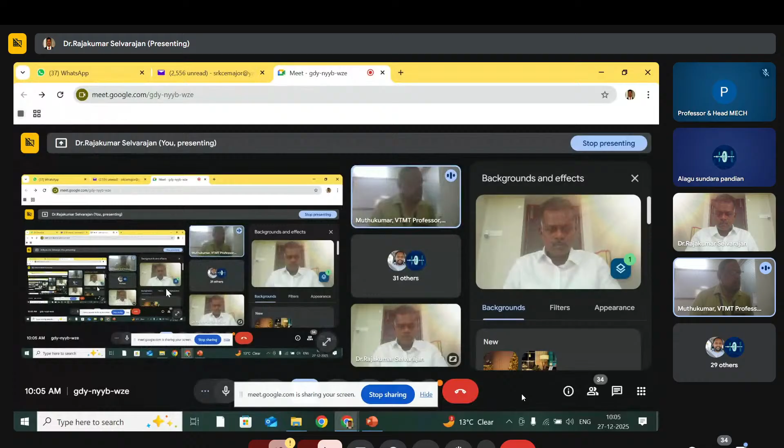Sir, can you please repeat the number of publications and his citation count? There was a disturbance. Sir, 109 publications in reputed international journals. Sorry for the small interruption in the beginning, sir. Dr. Rajakumar, sir, I am very indebted to you for guiding me through my research journey. This is my opportunity to express my gratitude for my research journey, and currently I am serving as professor in Vel Tech Multitech Engineering College, sir.

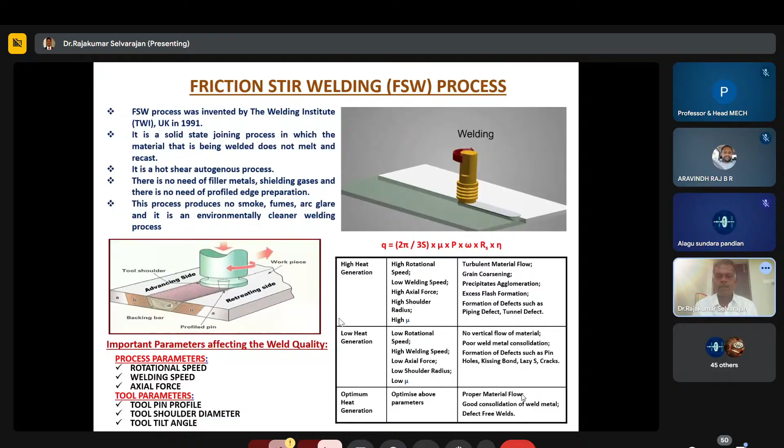So you can see that in the video. We have the facilities.

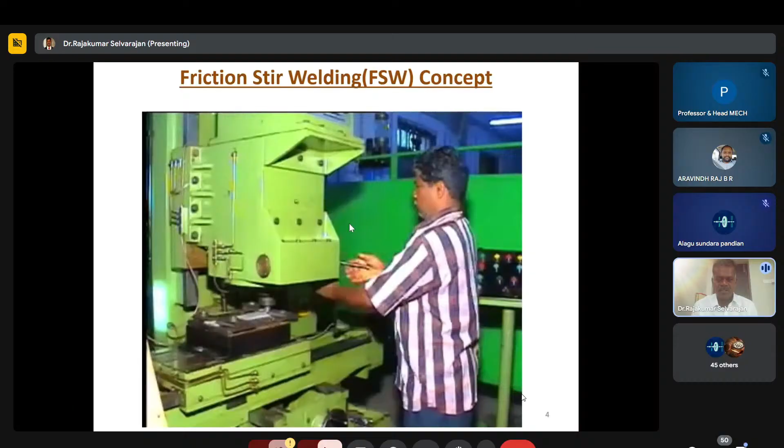It is not the CNC welding machine. It's a conventional welding machine - a vertical milling machine that has been converted into the welding process. You can see that this is the tool.

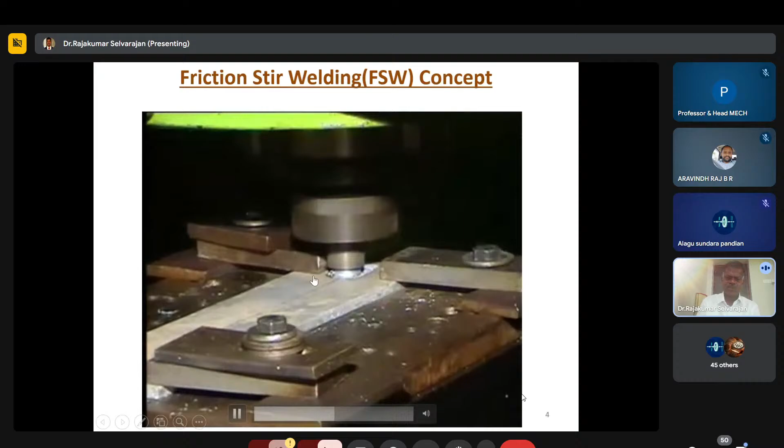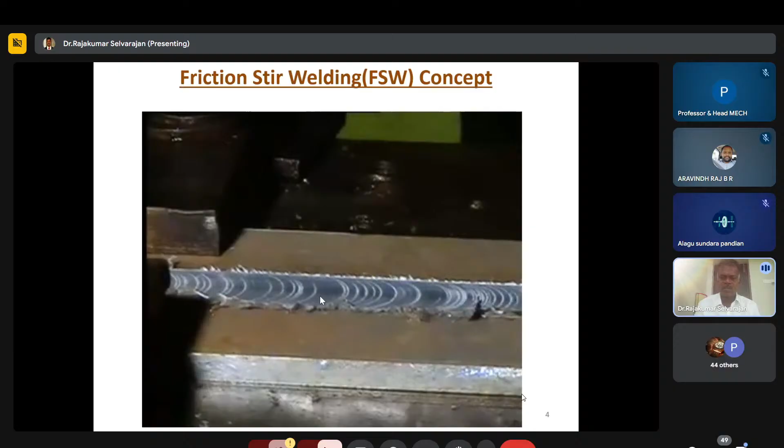You have to properly clamp the workpiece. Then you can see that the tool is rubbing over the workpiece, and the tool is extracted, right? The flash formation really depends upon the excessive heat input, so you have to remove the excess flash formation.

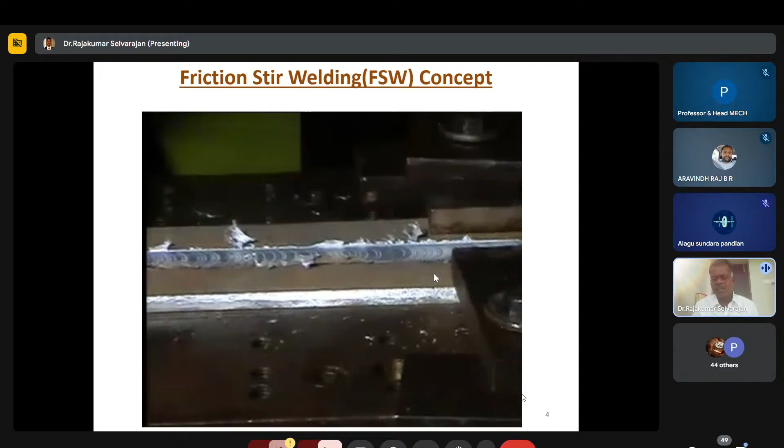It is already told that it is mainly suitable for the aluminum alloys and the magnesium - these are probably non-ferrous alloys.

So first you can see one of the case studies in this process. This work is to study the effect of friction stir welding process and tool parameters on weld quality of aluminum alloy. In this work, I have chosen aluminum 7075.

The condition is T6. Why I am choosing this material is that it is a high strength aluminum alloy, used in aerospace applications. As you can see, the panel, the wings, everything has to be made from aluminum 7075 alloy because of the lightweight and high strength. It is equal to steel.

And the importance of this alloy is that the corrosion is very less when compared to other materials. Cost wise it is also cheap.

So you can see the chemical composition of this alloy: the maximum is zinc at 5.1, and magnesium is 2.1, then silicon is 0.63 and copper 1.2.

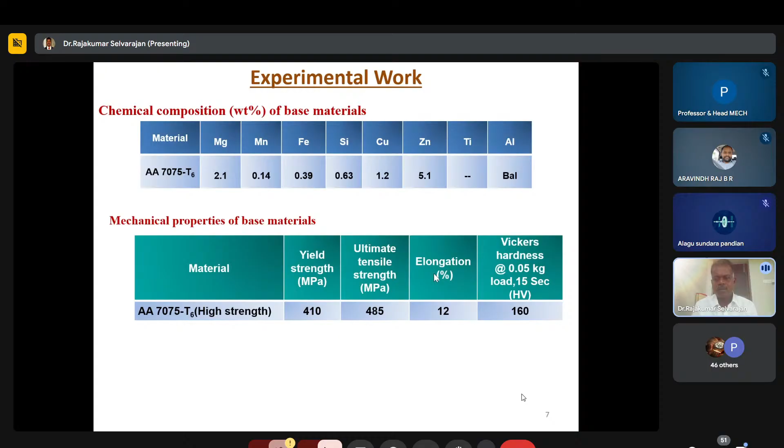And the mechanical properties of this alloy give a maximum ultimate tensile strength of 485 megapascal and a hardness of up to 160 HV.

So I have chosen 3 alloys, right? One is the pure aluminum alloy, and the second one is the medium strength, that is 6061, and 7075. I am giving this presentation only on the 7075 aluminum alloy.

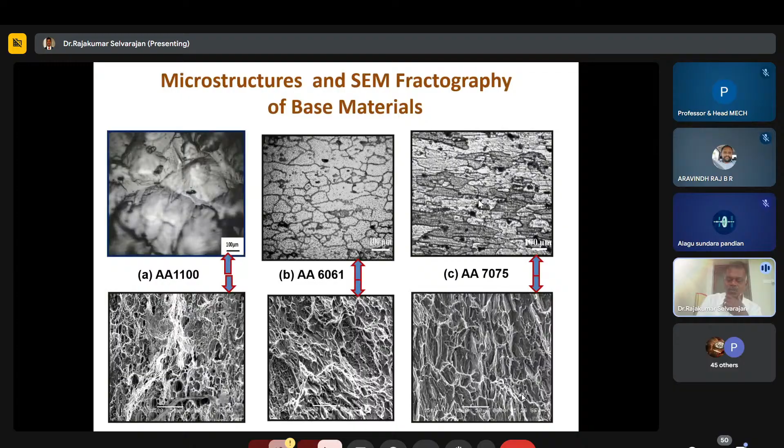In this work, I am using a 6 mm thickness of the 7075 aluminum alloy. So once the length of the pin is fixed, you have to keep it at 80 to 90 percent. Universally, the welding institute recommends 80% as sufficient for fixing the length of the pin, because if you keep it more, at 90%, it will go to the bottom of the plate.

So you have to maintain 80% of the pin length as sufficient to make the joint. And the diameter of the pin, you can make it equal to whatever the thickness is. For example, if you have a thickness of 6 mm for the aluminum plate, then the diameter you have to keep is 6 mm.

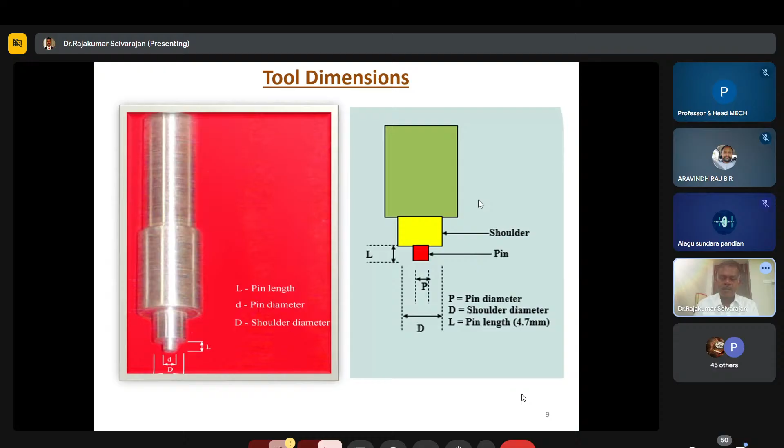Then the shoulder diameter you have to make 3 times the thickness of the plate. For example, if you take a 6 mm thickness of plate, you have to maintain the shoulder diameter at 18 mm. The length is 80%, right? That is the thumb rule for choosing tool pin profiles and tool pin diameters.

So another point - we have 2 machines for this. The first one, as you can see in the video, is conventionally a vertical milling machine, and this one is specifically and indigenously designed for, for example, you can see welding even steel. So it is a CNC machine. In our department, we have this facility.

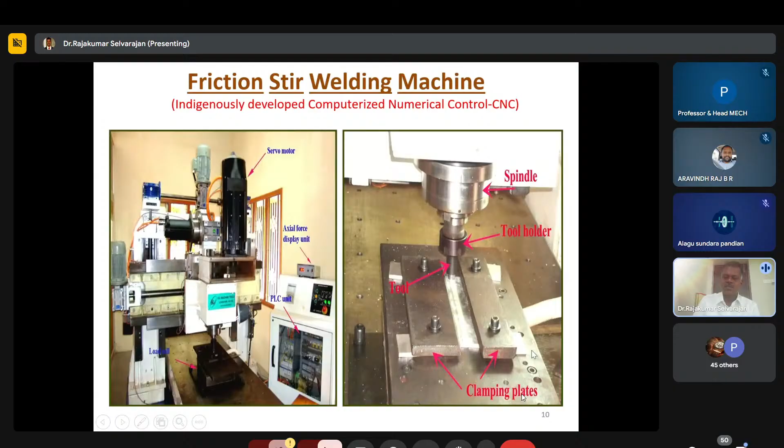This is a tool holder, and we have to keep the tool. This clamping device is required to keep the material properly clamped.

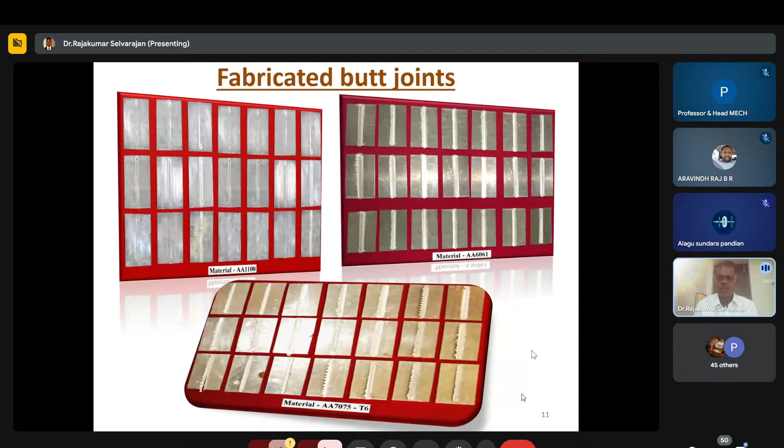This slide shows the fabricated joints of the pure aluminum alloy and 6061 and 7075 alloy. You can see the effect of process parameters on the mechanical properties, corrosion rate, and grain size of the 7075 high strength aluminum alloy.

So I am studying the effect of rotation speed on tensile properties, corrosion, and grain size, because corrosion also plays a vital role in the design aspects. In this work, we have to optimize for low corrosion as well as better mechanical properties.

You can see the rotation speeds we used: 1200 RPM, 1400 RPM, 1600 and 1800 RPM. We conducted the tests and recorded the values of the tested samples, like tensile strength, hardness, corrosion rate, and grain size.

For example, 1000 RPM rotation speed gives better mechanical properties compared with 1200, 1400, 1600, and 1800 RPM. I will explain why it gives better mechanical properties compared with the other variables.

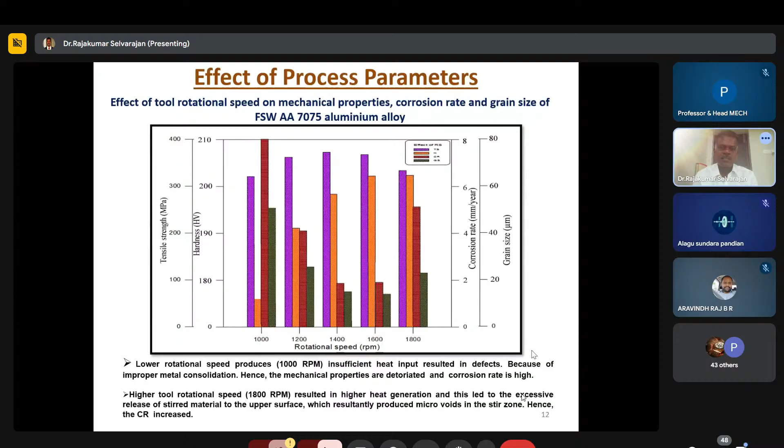Similarly, we have to capture the cross-section macro image. After welding, we polish it and go for the stereoscope microscope, and we have to visually see the size of the macro. We have to measure it.

At rotation speed of 1000 RPM, the heat input is 420 joules per mm, the tensile strength is 283 megapascal, weld hardness is 156 Vickers hardness, and corrosion rate, measured using immersion corrosion test, is 8.4 into 10 to the power minus 4 mm per year, and grain size is 40.3 micrometer.

So it ends up with a tunnel defect because the heat input is not sufficient to plasticize the material. This happens on the advancing side. When the tool rotates, the starting stage is the advancing side, so whatever material is pulled out from the advancing side gets stirred and redeposited to the advancing side. But because of low heat input, the area is not fully filled, so it ends up with a tunnel defect.

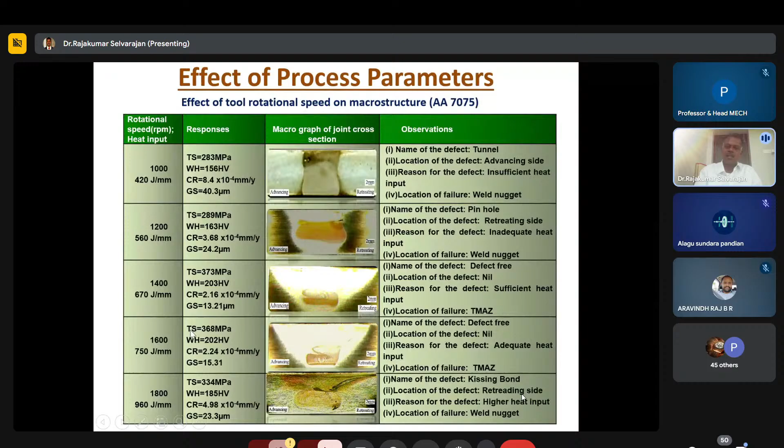The reason behind that: looking at the microstructure of all five conditions, at 1000 RPM the grain size is 40.3 micrometer, and at 1800 RPM the grain size is 23 micrometer.

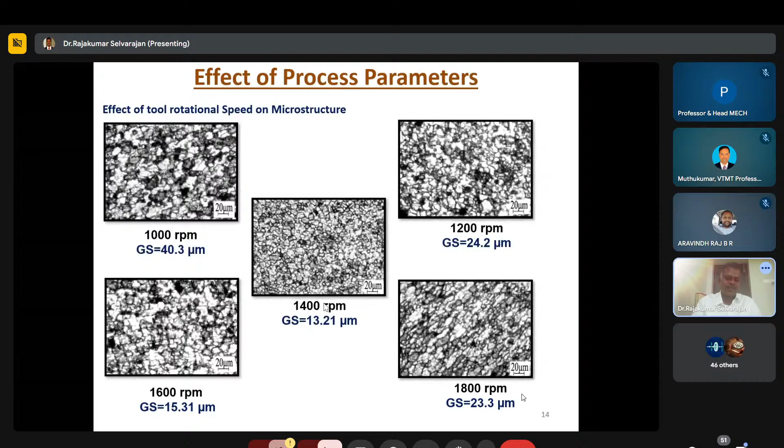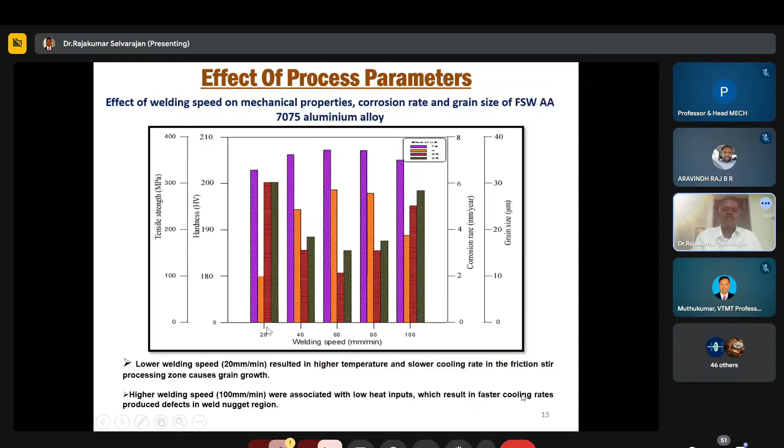So before conducting the experiments, we had to conduct trial experiments to fix the levels, for example 20 or 100. Initially we go for the trial experiments, then we can fix the minimum and maximum range.

Again, after welding we go for the macrograph and observe visually. You can see the naked eye, and you can see any defect present in the weld cross section. You can see that 20 mm and 40 mm give some defects, like a wormhole, which may be present on the retreating side, mainly because of excessive heat input.

You can see that 60 mm per minute gives the better mechanical properties and defect-free joints; we achieved this at 60 mm per minute. Then if you increase the welding speed, because of insufficient heat input, it ends up with tunnel defects on the advancing side.

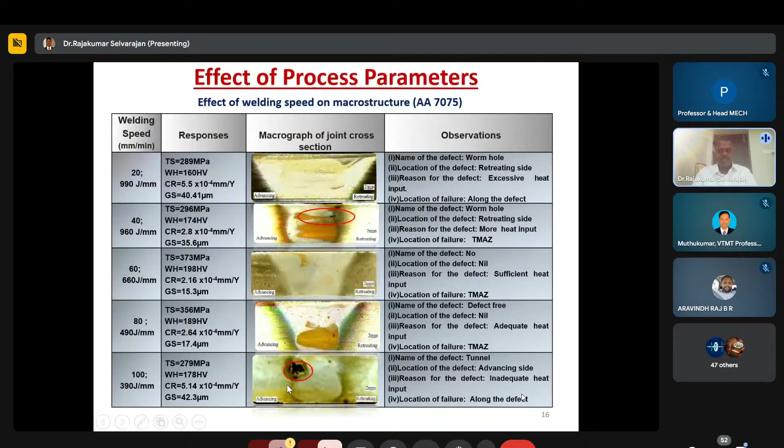And similarly, we had to cross-examine why 60 mm per minute gives the better mechanical properties.

Then we go for the optical microscope to study the grain size measurement and the size of the grains. You can see that the grain size at 60 mm per minute is lower compared to the other welding speeds, and because of that it gives better mechanical properties.

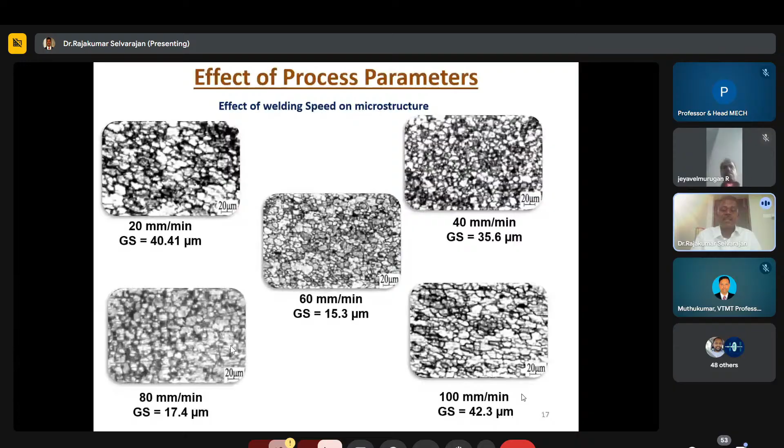And we have to go for the fracture morphology using a scanning electron microscope. You can see that 20 mm per minute gives coarse dimples and the fracture morphology shows quasi cleavage. At 40 mm per minute it also shows coarse dimples. You can see that 60 mm per minute gives very fine dimples compared to the other welding speeds, so 60 mm per minute gives the better mechanical properties and lower corrosion in the welding process.

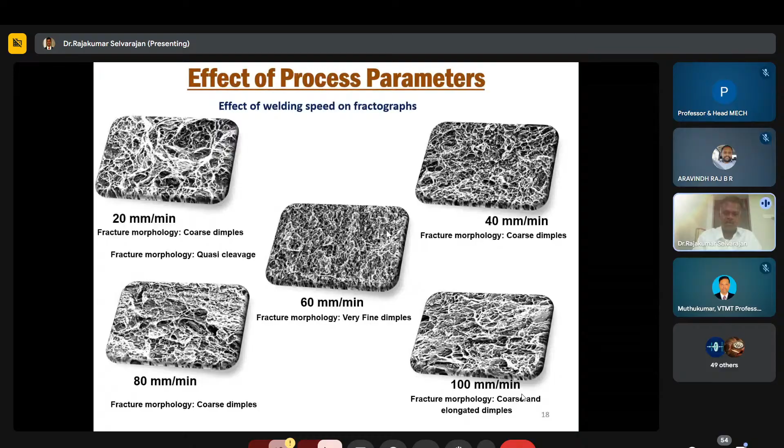And you can go for another variable, like axial force, because the plunging force has a crucial effect on the mechanical properties. You can see the tensile strength and hardness. The axial force of 7 kilonewtons gives the better mechanical properties and lower corrosion rate compared to the other axial forces. From that bar chart, you can easily understand that the axial load of 7 kilonewtons gives the better mechanical properties compared to the others.

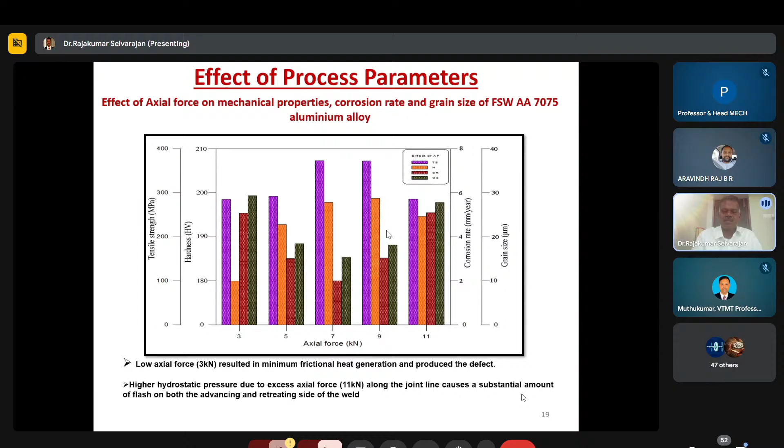You can also test the macrostructure: 3 kilonewtons gives a pinhole defect on the advancing side, and 5 kilonewtons gives wormhole defects on the retreating side. You can see the defect-free joints are achieved at 7 kilonewtons, which also gives better mechanical properties compared to the other axial forces.

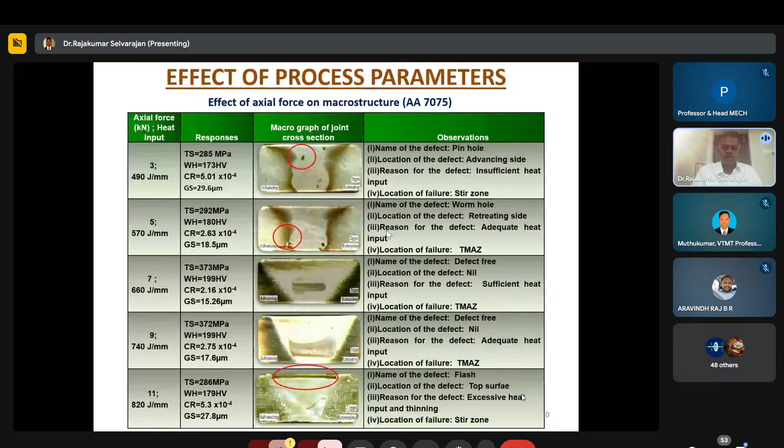Then going to the optical microscope, you can see that 7 kilonewtons gives a grain size of 15.26 micrometers, which is minimum compared to the others, so 7 kilonewtons also gives good mechanical properties.

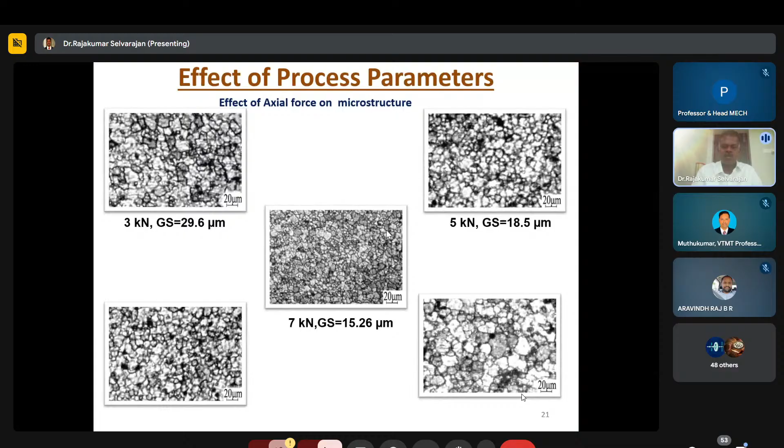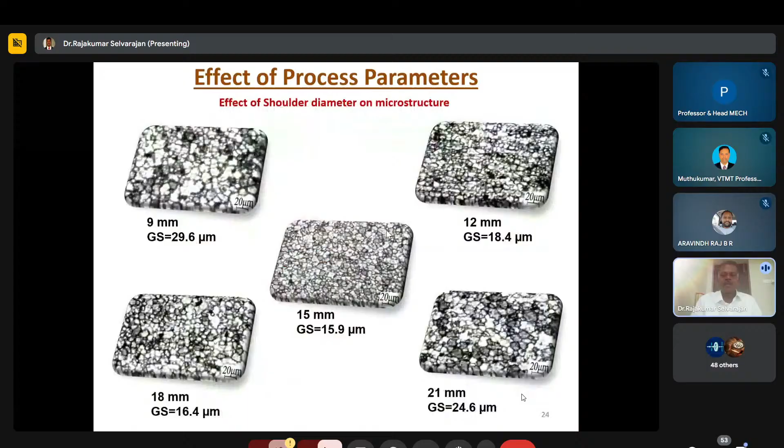Similarly, we have to test the effect of process parameters for shoulder diameter and pin diameter, and tool material hardness also has to be evaluated.

From that, we can conclude that FSW joints are prone to defects like pinhole, tunnel defect, piping defect, slip bond, cracks, etc., mainly depending on improper flow of material and lower or higher heat input. So we have to optimize and analyze it through trial experiments, then fix the optimum process parameters. The proper process parameters give better mechanical properties. So from this, I suggest that this process is mainly suitable for aluminum alloys.

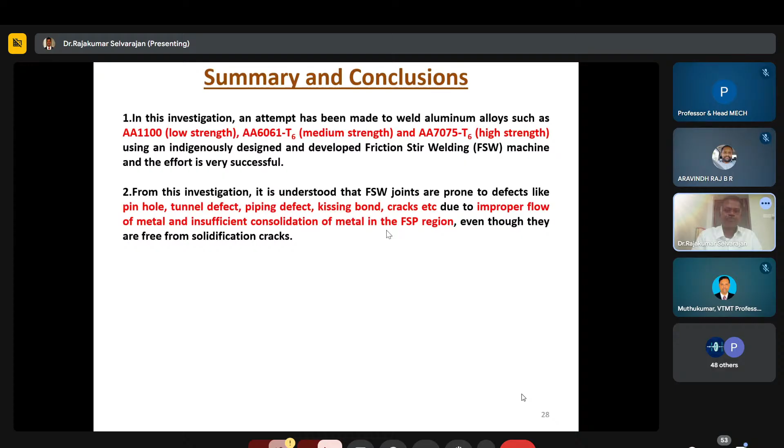So second, the solid state welding process is the linear friction welding process. Whatever the previous process we discussed, you can do it in a flat specimen or even a rotary pipe with the friction welding process. But in the linear friction welding process, you can make the welding only in non-axisymmetric specimens. You can see that one by one.

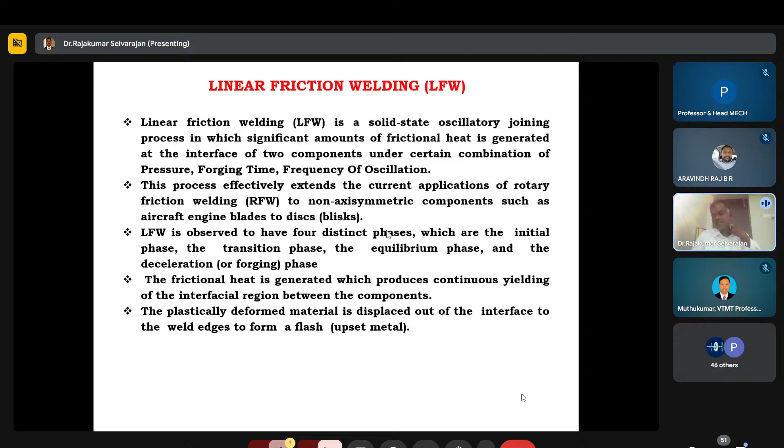This process depends upon 4 phases. The first one is the initial phase, then the transition phase, the equilibrium phase, and the deceleration phase, which is called the forging phase. This mainly depends upon the frictional heat generated, and it mainly depends upon the yielding of the interfacial region. You can see it one by one.

The initial phase is where you keep the component - one is the stationary workpiece and the other is the displacement, which has to be an oscillatory motion. This takes place in the initial phase.

The second phase is the transition phase. Here you apply friction pressure, and because of the rubbing of the interface region, friction heat is generated, and the transition will take place.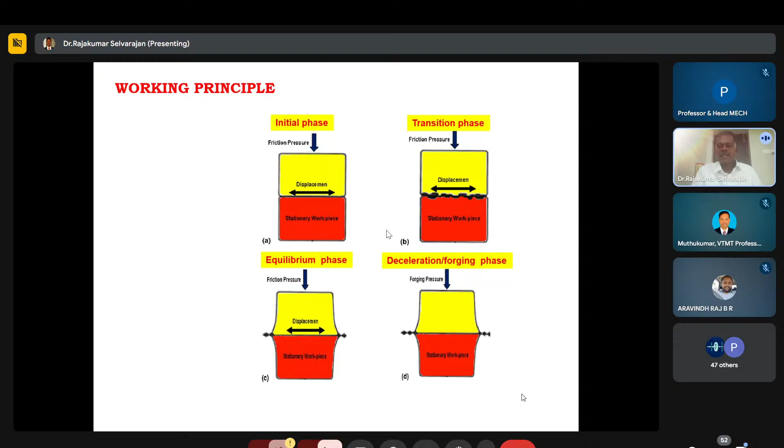Then the equilibrium phase - because of the displacement, the interface region is plasticized. Then you apply the forging phase, and the bonding takes place. That happens in the last phase, the deceleration forging phase.

This is the machine setup for the linear friction welding machine, which is available in our manufacturing department.

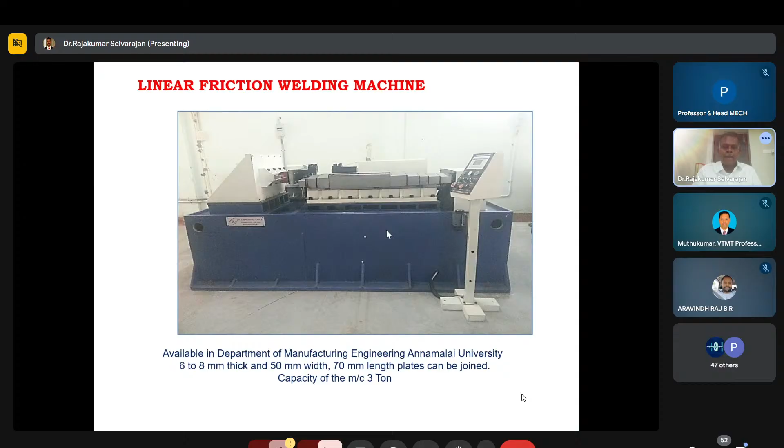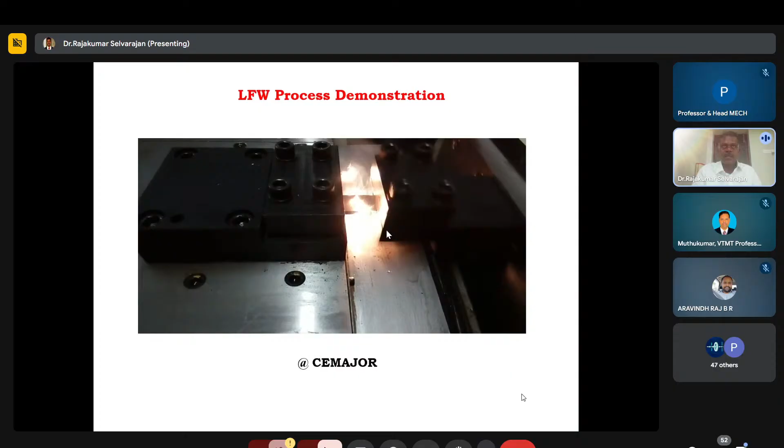You can see a small clipping of the linear friction welding process. One is stationary and the other is movable - it has to move linearly. Because of rubbing over the two components, friction heat is generated. Then because of the friction heat, flash will be formed, and you can apply forging pressure. Then the joint will take place. One is kept stationary.

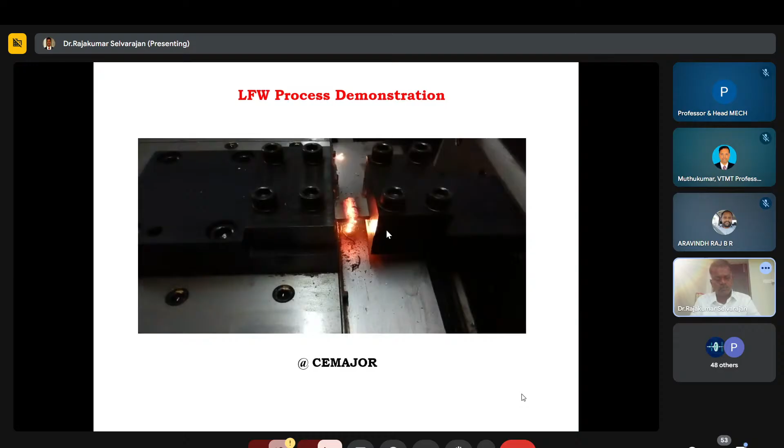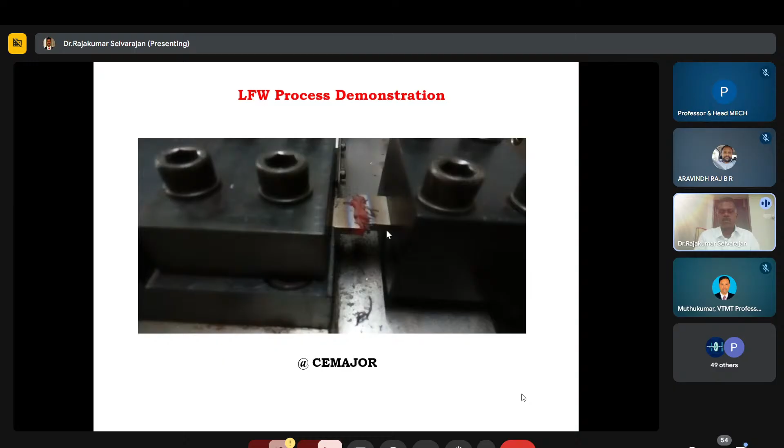You can see that very good joint configurations, or defect-free joints, can be achieved through this linear friction process. You can remove this flash by using chipping or grinding operations to remove the excess material.

This is important not only for the linear friction welding process, but also for rotary friction welding. Flash formation has to be maintained through proper process parameters, so only a very limited amount of excess flash comes out. You can remove it with external chipping or grinding operations.

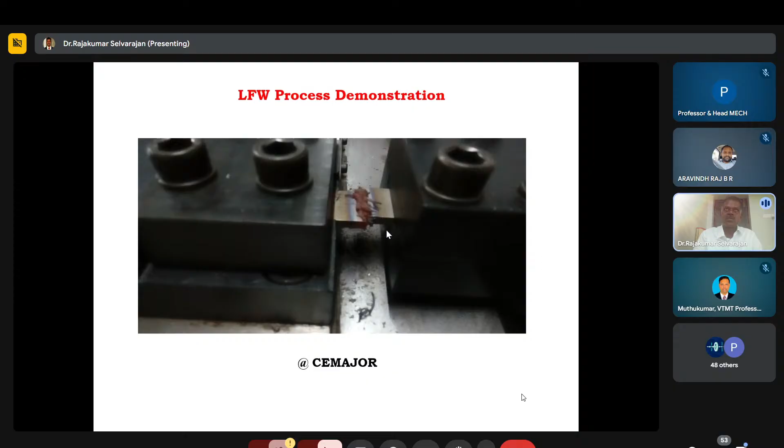You can see the stage-by-stage process of linear friction welding. The first stage, as already mentioned, is the contact phase - one end is kept stationary and the other undergoes reciprocation.

One workpiece has to be stationary, and the other is given load and reciprocated in the linear direction. A proper jigging system and proper clamping is required for the workpiece to avoid slipping actions, because due to the linear and vibratory motions, in some cases it may slip, so you have to keep the clamping proper.

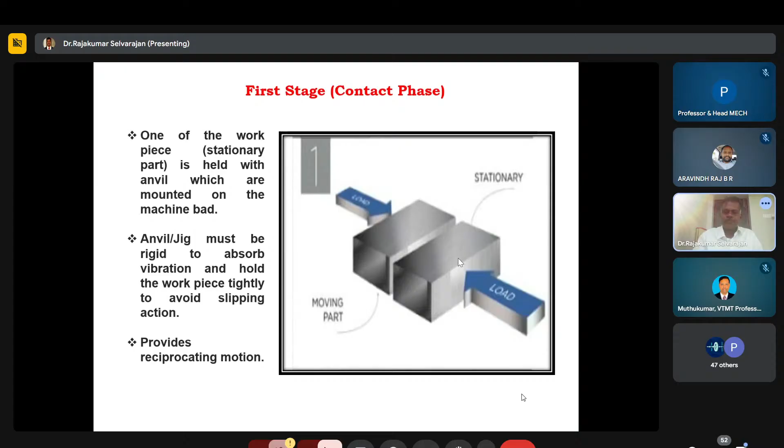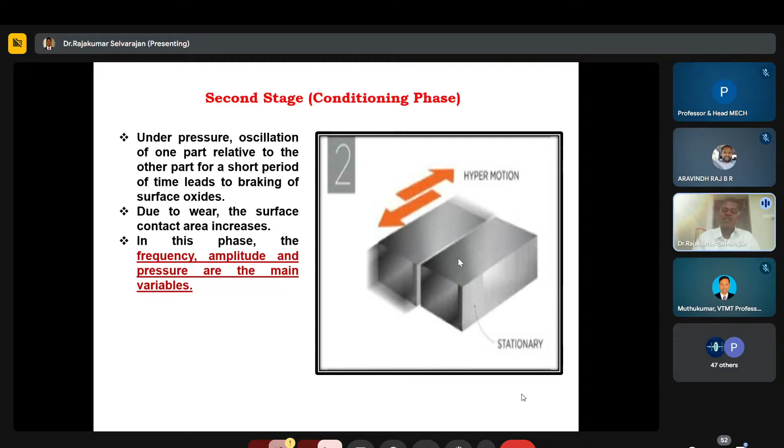The third phase is the burn-off phase. Burn-off phase is nothing but the excess amount of flash formations. Because of the shearing oscillating movement between the two parts, the extrusion of interface materials comes out as flash. This is the burn-off phase.

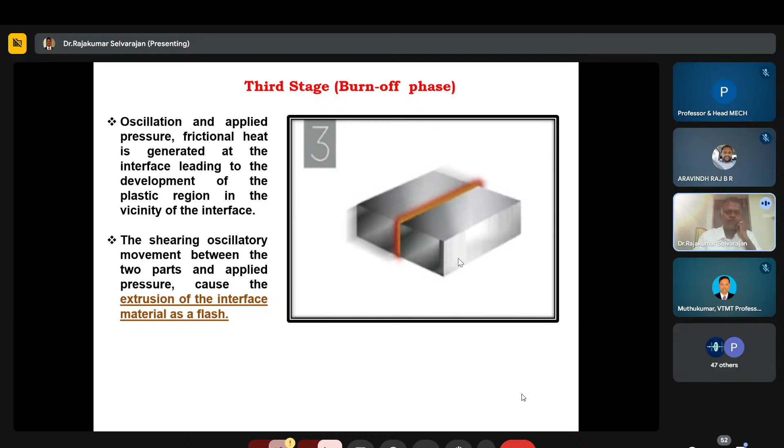The fourth phase is called the forging phase. This phase plays the main important role in the final stage of the joining. Because of the forging pressure applied, the material on both sides undergoes forging. So the metal is joined together because of sufficient temperature and the linear oscillating motion.

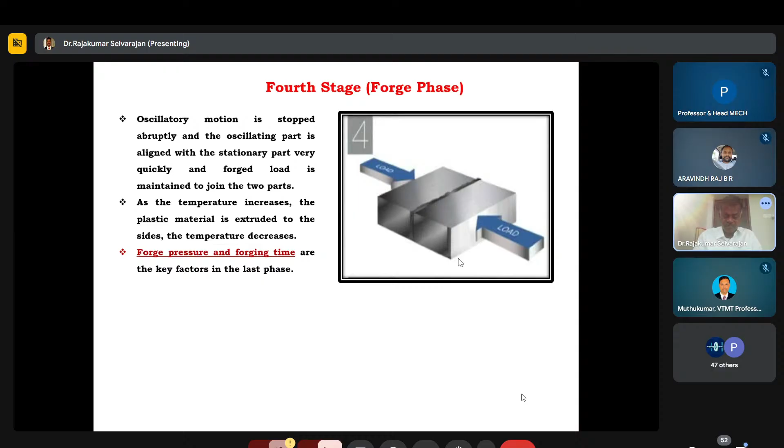From this linear friction welding process, we can make n number of configurations. It is proven for plate to plate, round to square, tube to plate, and square to square combinations, all possible through this linear friction welding process. But it requires proper clamping devices to join these kinds of configurations.

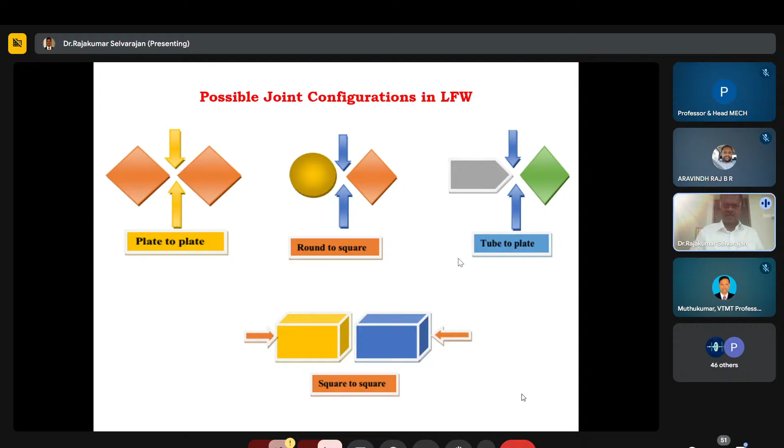The flash development is another important aspect of this linear friction welding process, and this flash development has to be controlled. It mainly depends upon the oscillatory motion and applied pressure. The length of the flash mainly depends on the reciprocating direction—if the reciprocating direction is longer, then the flash will be higher. So you have to control this through proper process parameters.

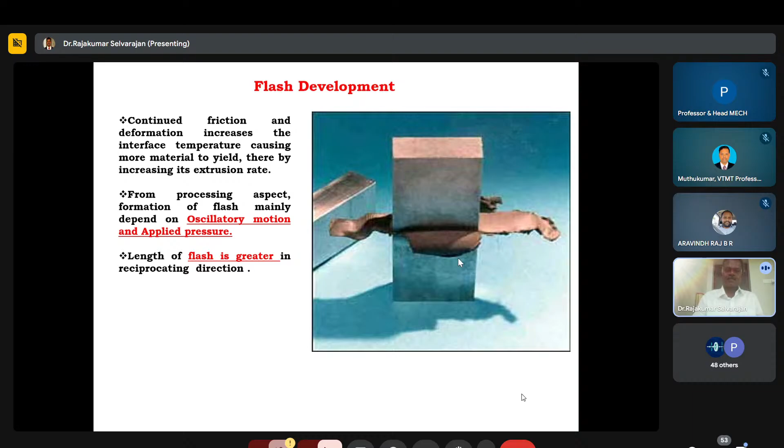Now the bonding mechanism of the linear friction welding process. Mainly the viscous plastic flow and mechanical intermixing are the two combinations at the interface material. The two weld parts result from movement under pressure and subsequent forging. Metallic bonding takes place because of the sharing of electrons, and in the high temperature softened region, adjacent layers of material mechanically mix with each other, achieving uniform stages before completion of bonding. The adiabatic heating caused by high strain rate deformation at the interface improves the softening and intermixing of the mating surfaces.

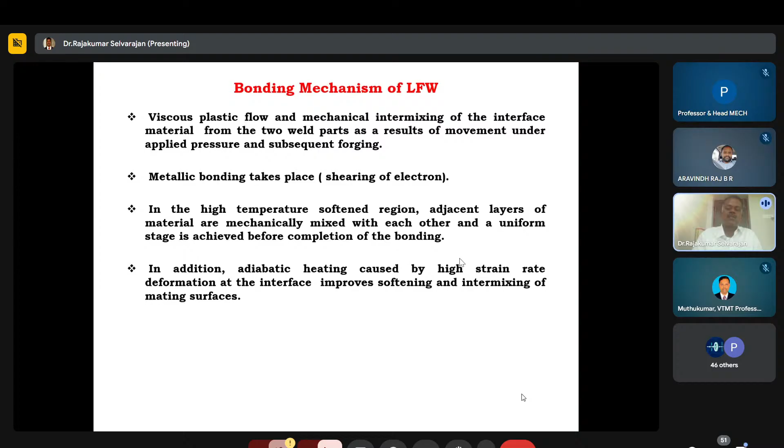Looking at the process parameters of linear friction welding: frequency is the number of oscillatory cycles per second, and ramp up time is the time taken to increase the welding parameters to the required steady state level. The third one is amplitude, which is the maximum displacement of the oscillating sample from its equilibrium position. Then friction pressure is the pressure applied during the frictional phase of the process, calculated using the nominal contact area at zero amplitude.

Then there's burn-off distance, which may be expressed as time or cycles—factors that trigger the start of the forging phase. Then decay time is the time taken to reduce the amplitude to zero at the beginning of the forging phase. Forging pressure is applied during the forge phase of the process, and forging time is the amount of time the forge pressure is applied. These are the important process parameters which affect the quality of the weld.

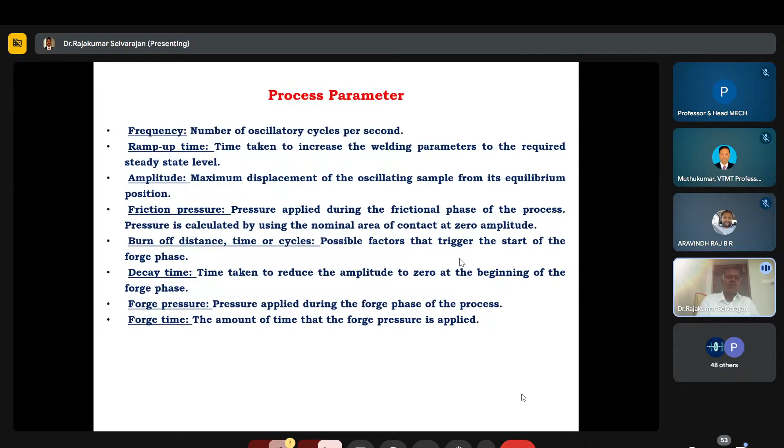So you can control the weld quality by monitoring these process parameters.

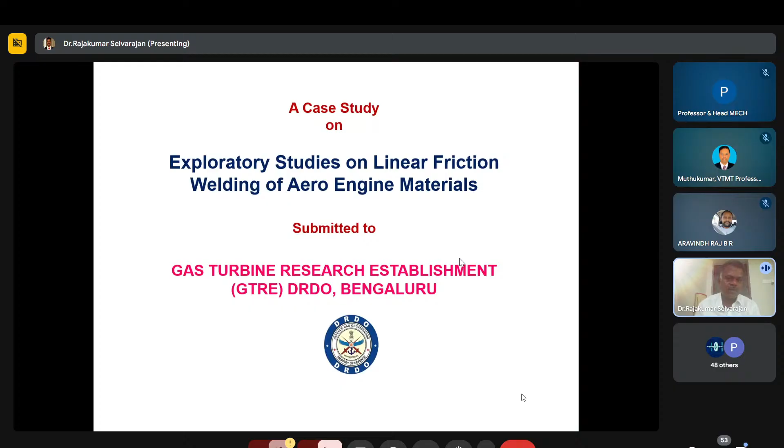A case study we got from a project with GTRE, Bengaluru: linear friction welding of aero engine materials. In this work we are using Titanium 64 alloy. This problem was given because in the aero engine's power component, the disc and other parts are made of Titanium 64 alloy and also Inconel 718 alloy. They were using electron beam welding to fabricate this component, but the problem was that electron beam welding is costly, and the setup cost is also high, so they were thinking to go for the linear friction welding process.

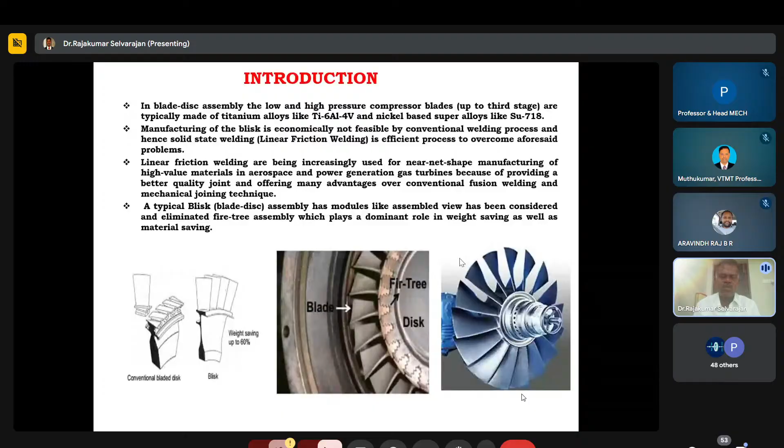So we tried to do some work on this process using the Titanium 64 alloy. Through trial experiments, we obtained a friction pressure of 22 megapascals. We used 5 process parameters: friction pressure, friction time, forging pressure, forging time, and frequency.

Similarly, increasing the friction and reducing the friction pressure and friction time to 30 seconds, forging pressure 5 megapascal, forging time 3 seconds, and frequency increased to 14 hertz, the flash formation is good but still not welded. Flash is formed, but the weld has not happened.

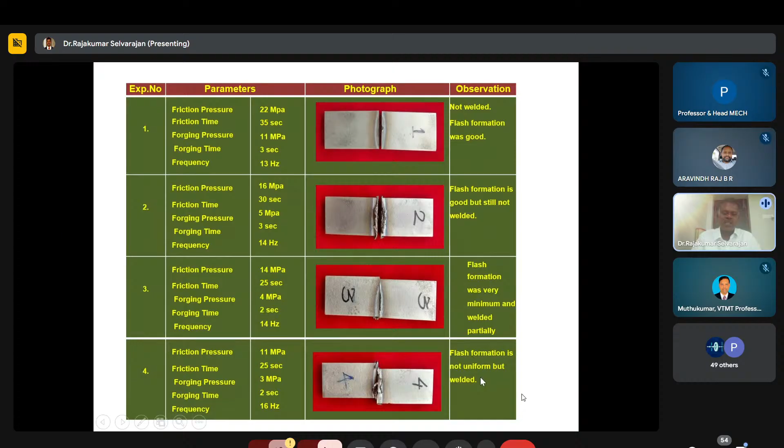Then we are trying again, changing the process parameters: 25 second and 23 second friction time, and increasing to 30 second and 35 second.

So probably in some cases the flash formation is not uniform but welded. In some cases there are good flash formations and welding. In some of the cases you can see that flash formation is not uniform but still welded.

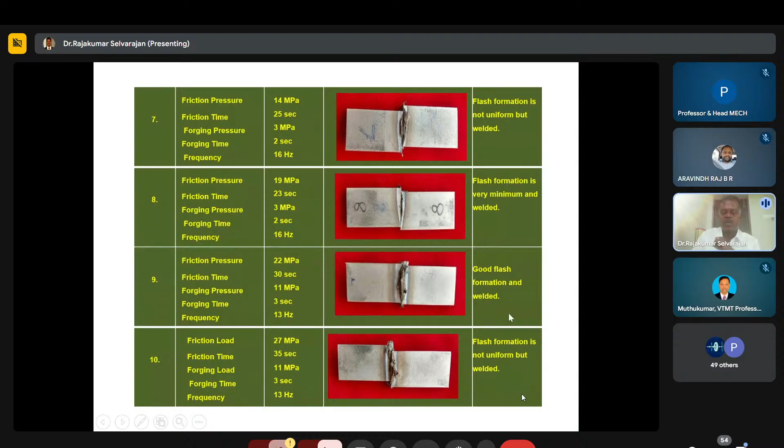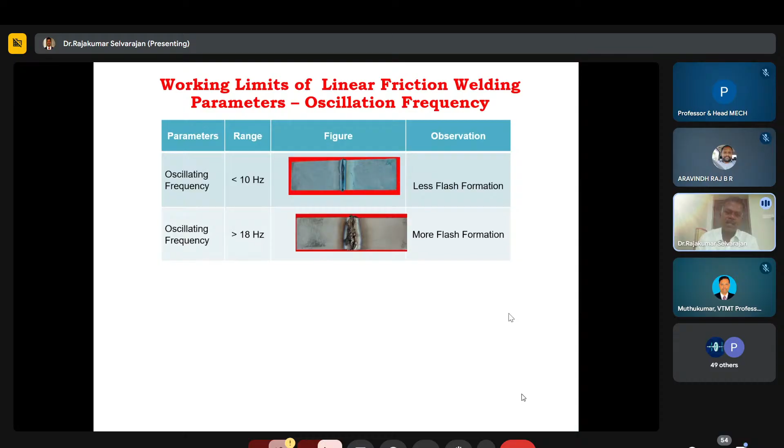So then finally we can optimize the range of the process parameters. You can see that with oscillating frequency less than 10 hertz, there is maybe less flash formation. With oscillating frequency greater than 18 hertz, more flash will happen. So we are limiting the oscillating frequency, and after that we can make a proper weld.

You can see that at 10 hertz, flash formation is possible but there are no defects. And you can see at 12 hertz, 14 hertz, 16 hertz, and 18 hertz, the interface regions are not fully bonded, but flash formation will be high.

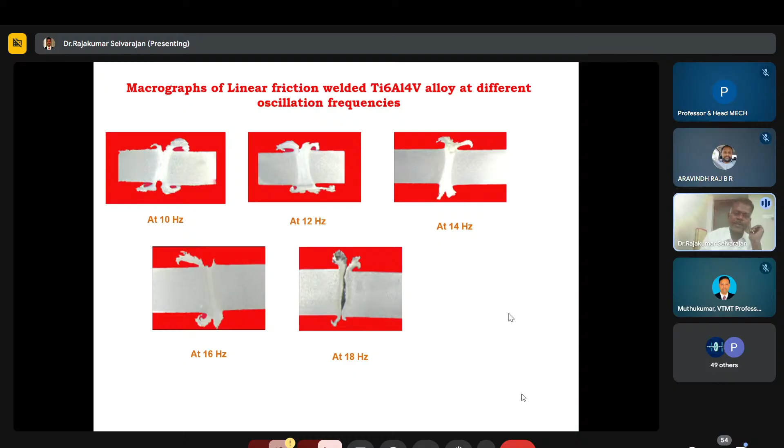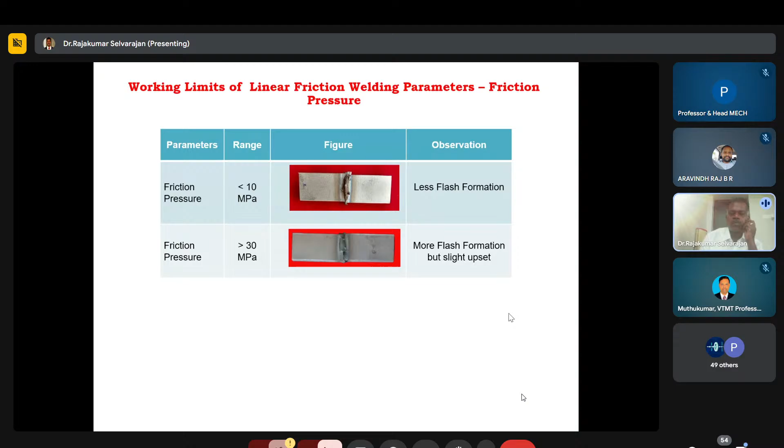You can see that we can also fix limits for the friction pressure. Less than 10 megapascals gives less flash formation, and greater than 30 megapascals gives more flash formation, but slight upset is taking place.

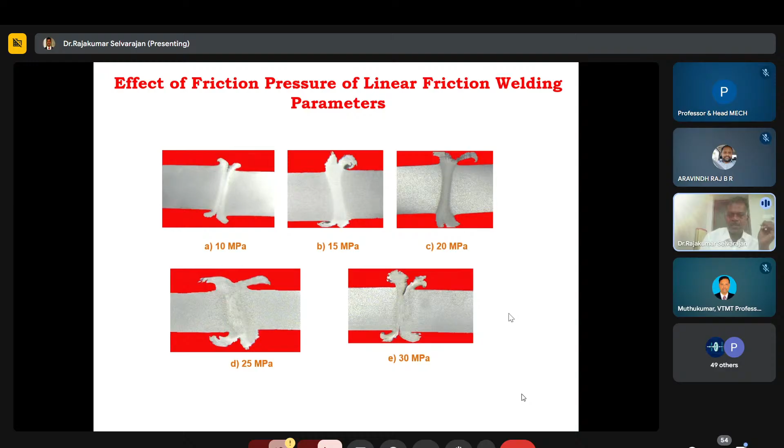Then you can go for the effect of friction pressure as a linear friction welding parameter. You can try 5 different friction pressures: 10 megapascal, 15 megapascal, 20, 25, and 30.

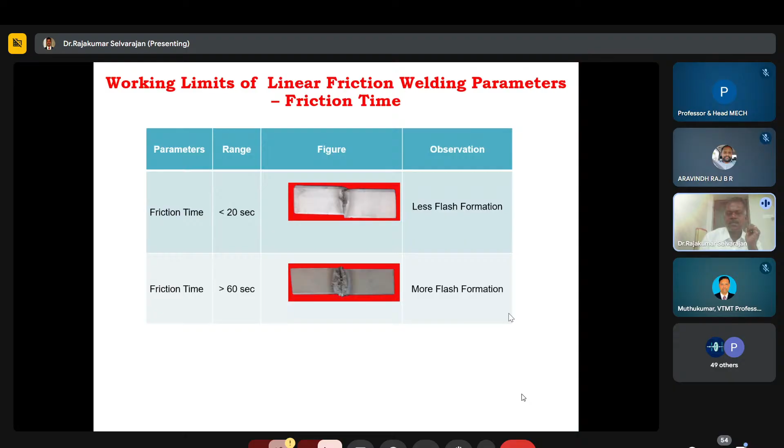And then we can go on fixing the friction time. You can see that less than 20 seconds gives less flash formation, and greater than 60 seconds gives more flash formation. From that limit, we can conduct experiments at 20 seconds, 30 seconds, 40 seconds, 50 seconds, and 60 seconds.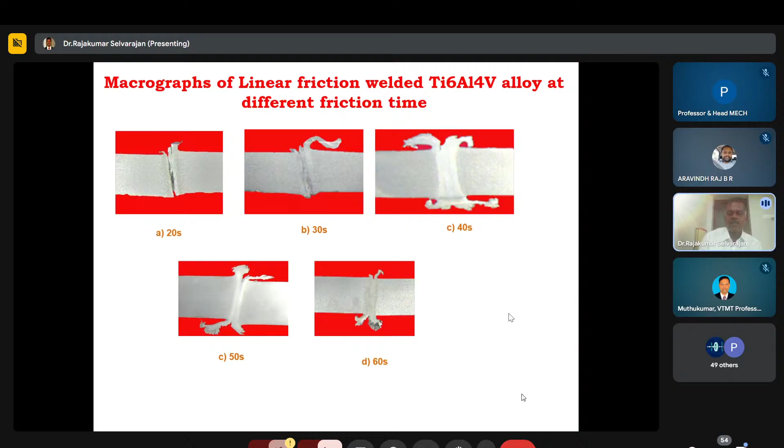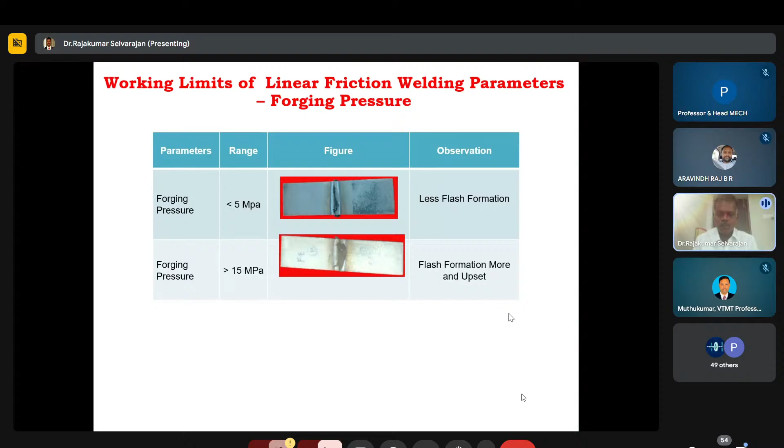And then the working limits for the forging pressure: less than 5 megapascals gives less flash formation, and higher values give more flash formation along with upset.

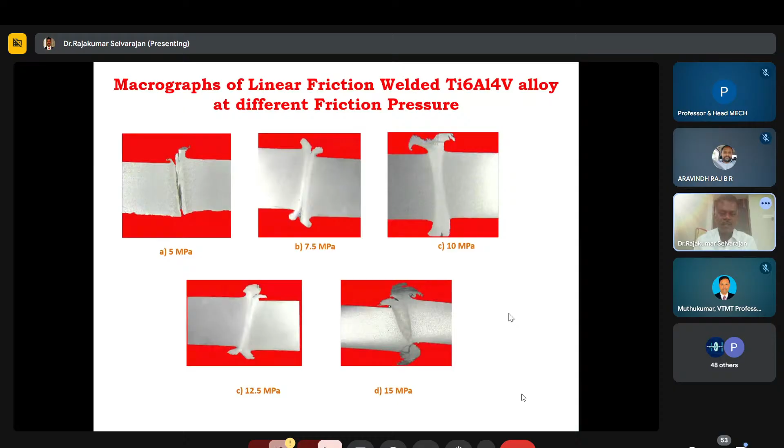From that, within the range we can do some experiments at 5 megapascal, 10 megapascal, and 12.5 megapascal. You can see that at 15 megapascals, the amount of flash and the regions also deviated.

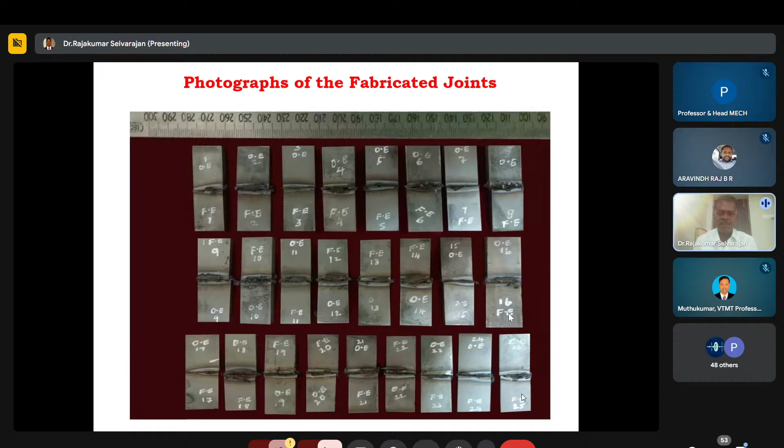So within that combination of process parameters, we have to fabricate the joints, and then we have to fabricate the tensile test coupons as per the ASTM standard, and test them with the help of the UTM.

And you can see that the ultimate tensile strength of the titanium 6Al-4V alloy, the maximum UTS is 996 megapascal, and the yield strength is 926 megapascal, and the elongation is 13% with reduction in cross sectional area of 30%.

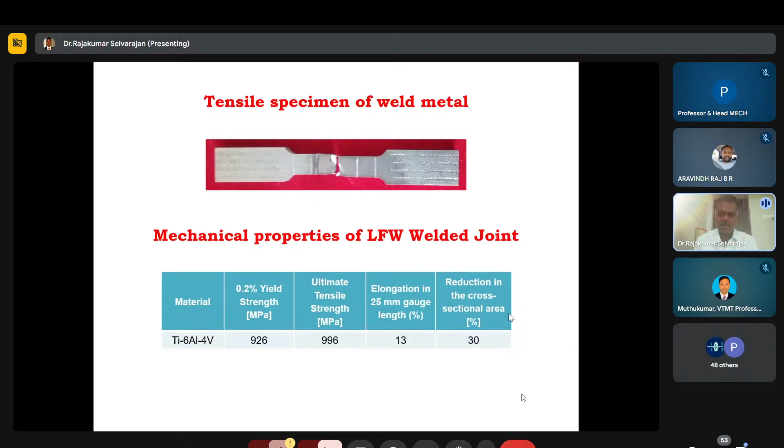Whatever specimens and coupons are prepared as per the ASTM E8 standards. And you can see that the fracture surface shows striations in the zone, without voids, and long and finer equiaxed grains are present in the interface regions. This is the fracture morphology of the tensile specimen.

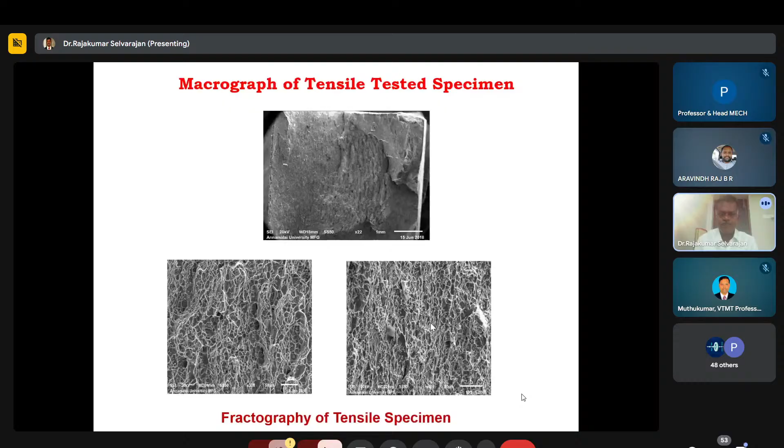And then we can examine the grain orientations through the optical microscope.

You can see the weld center has fine and equiaxed grains, and the TMAZ region partially shows fine grains, though in some cases coarse and long elongated grains are present in the TMAZ region. The unaffected base material grain size is somewhat higher than the weld center. In the heat affected zone, you can see that the grain size is higher compared to the unaffected base metal.

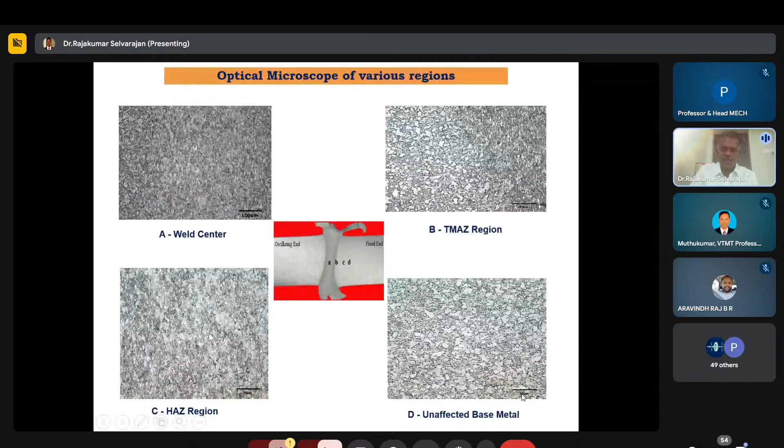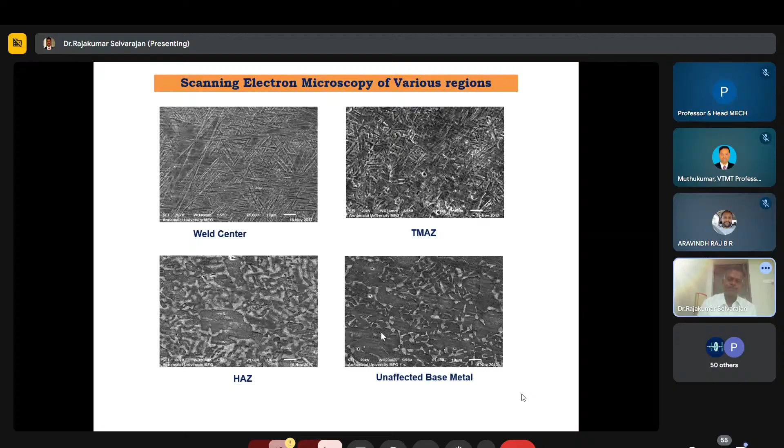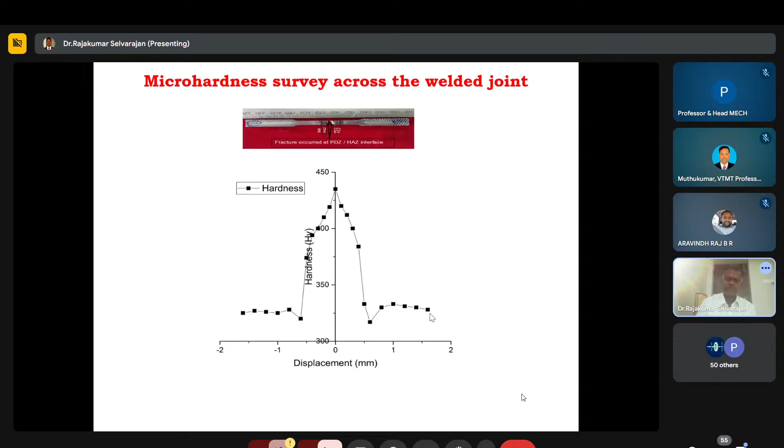We can take into the hardness through a hardness survey across the weld region. The weld center gives a maximum Vickers hardness of 440, the TMAZ region gives 320 or 330, and the base metal gives less than 330 or 340.

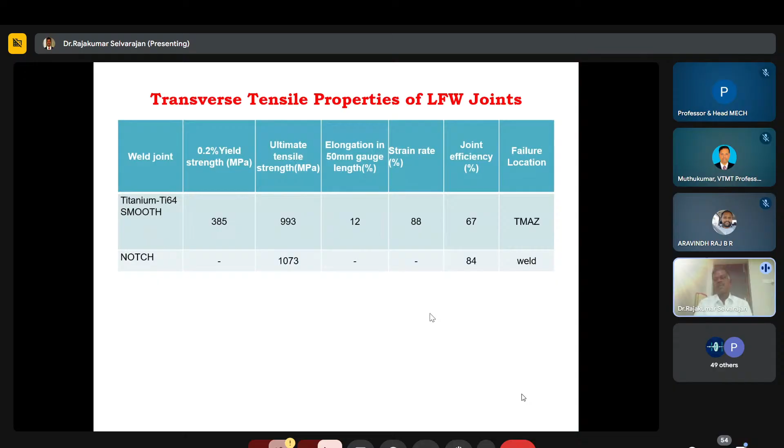This table records the tensile properties. We achieved a maximum tensile strength of 993 megapascal and notch tensile strength of 1073 megapascal, with joint efficiencies of 67% and notch efficiency of 84%. The weld failure region occurs in the thermomechanically affected zone, and the notch failure is in the weld region.

Conclusions from this linear friction welding work: titanium alloys made using an optimal level of 20 megapascal exhibited maximum tensile strength of 993 MPa and elongation of 8%, with notch tensile strength of 1073 megapascal and NSR of 1.041, revealing ductile fracture. The linear friction welded Ti64 joints revealed 96.41, 104, and 66.67 of UTS percentage, with elongation parameters also achieved. The superior smooth and notch tensile properties of joints are principally attributed to maximum refinement of alpha-beta grains at the interface region, where the bimodal microstructure transforms into a Widmanstätten structure. This is the reason for achieving the maximum tensile strength.

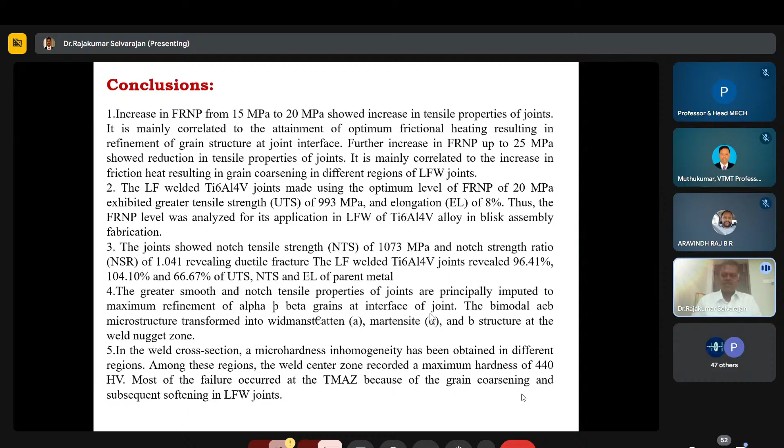The next one is the conventional welding process. As mentioned at the start, one more novel technique in conventional welding is the plasma welding process. Plasma is essentially the fourth state of matter, beyond gas, solid, and liquid. It is another variant of the TIG welding process.

In this work they use a non-consumable tungsten electrode that acts as the plasma nozzle. It is mainly made from tungsten electrode, and the plasma nozzle is made of copper, with the tip diameter of the torch probably around 30 to 60 degrees.

This process has three variants from one machine. One is microplasma, with current range of 0.1 amps to 15 amps. Then soft plasma or medium range is called 15 to 200 amps, used for 2 to 4-5 mm thickness material. Keyhole plasma is above 100 amps current range.

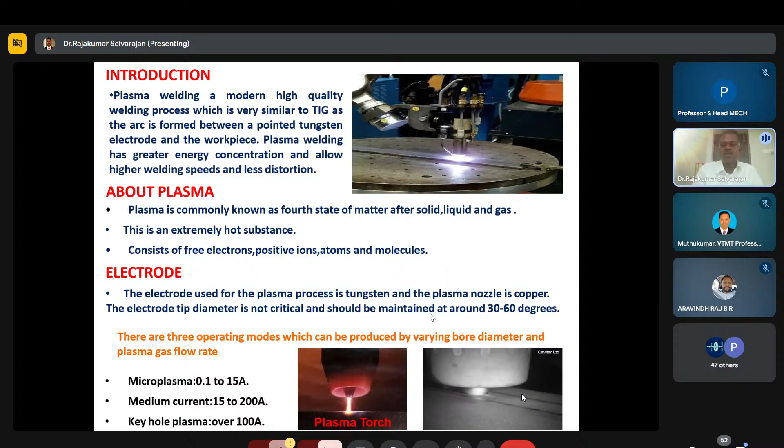The next one is the plasma welding process. The working principle has two separate regions: one is the plasma region with the blue color indicating the plasma tungsten electrode, and it sends two gases - one is the plasma gas and another is the shielding gas.

You give a DC power supply, resulting in a highly concentrated flame. The weld pool is remarkably similar to the laser welding process. The plasma is usually operated with DC, showing drooping characteristics of the power source.

Because of its unique operating features, it results in special torch arrangements with separate plasma and shielding gas flows. It is not stabilized with sine wave alternating current because extreme heating of the electrode during the positive half cycle causes balling of the tip and can disturb arc stability.

The advantages of this process are deeper penetration and high welding speed, and you have greater tolerance to surface contaminations, including coatings.

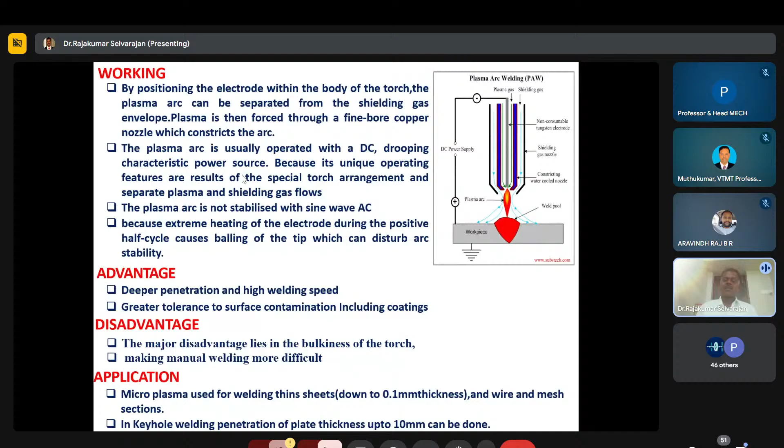You can see this in boiler manufacturing, such as boiler drums, superheaters, and water walls. The tip of the 304H tubes has a wall thickness of nearly 12 to 13 mm, because recently they are fabricating tubes in Inconel materials, probably 625 tubes. In some cases they are also using 718 tubes, because advanced ultra-supercritical boilers use 718 tubes. In those cases, you can go for plasma welding, like the keyhole welding process.

Here's another case study for the plasma welding process. In this work we are using Inconel 625 alloy, which is mainly used for aero engine applications.

This is because it can withstand temperatures of 650 degrees centigrade, while the working temperature inside the engine is 600 degrees. So Inconel 625 is mainly used in high temperature applications like rocket engines and gas turbine engines. It also has good stress rupture properties, and good resistance to corrosion and oxidation are the major important properties of this alloy.

The origin of the problem when using this material is that, as we are all aware, Laves phase formation occurs. In other welding processes, like conventional TIG welding, the Laves phase forms during welding, which ends up causing crack initiation because alloy segregation takes place.